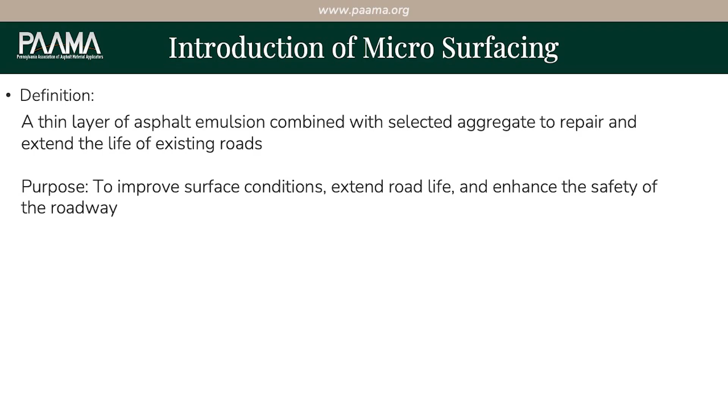Microsurfacing. So a thin layer of asphalt emulsion combined with selected aggregate to repair and extend the life of existing roads. Right, so we're extending the life of existing roadways, much like these other surface treatments. We want to improve the surface condition, extend road life, enhance the safety of the road. We're going to talk a lot about improving friction, improving polished roadways, applying something that we don't have to change the curb reveal, a lot of other benefits to microsurfacing.

In Pennsylvania, which is fairly unique to Pennsylvania, we use our own nomenclature, right? We use a type A, a type B, and a rut fill. We're going to go through the gradations here in a minute, but as you could imagine, type A being fine, right? Type B giving you a little bit more beef to your roadway, a little bit larger aggregate. And then your rut fill, now we're putting that down a little bit thicker. We're going to use a larger, coarser aggregate. This is taken straight from the 408, right? It says use to fill deep 2-inch ruts in a single pass. And I'm going to show you some examples of rut filling.

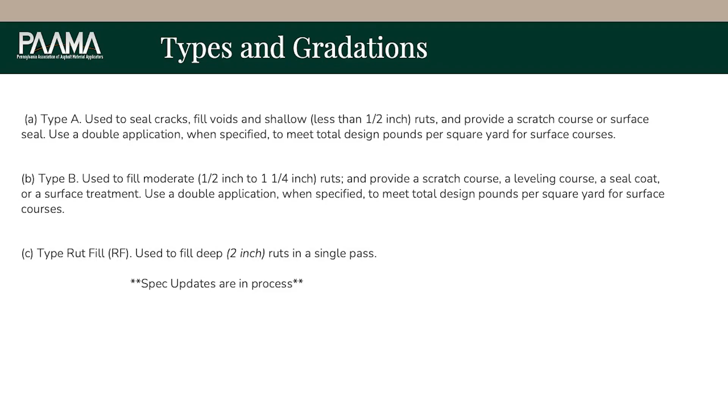Right, I feel like every contractor stands up and they have their asterisks, right? Special provision. We're currently, PAAMA, and I alluded to this earlier, trying to update the specifications with PennDOT. It's my understanding that will become less than 2 inches. ISSA's guideline, so the national guideline, is 1.5 inches for microsurfacing. And in some cases, depending on return to traffic time and other problems that could arise, I don't know that that's the best use of microsurfacing, especially as those ruts change in size, change in width, and the pavement condition underneath, right? So the rut fill, to me, is always a little bit of a moving target, but 2 inches is aggressive for microsurfacing.

So as we look at the gradation chart for type A, 9.5 millimeter, at least 100% passing at 9.5. You can retain some at the number 4 sieve. For a type B, which is, I'll go back to the District 3 presentation from this morning, commonly used as the first layer, right? So we're putting that down first. That's a 12.5 top end, 12.5 millimeter.

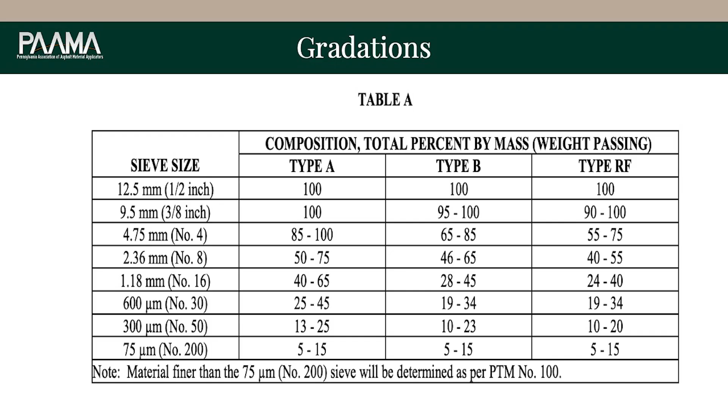Microsurfacing. When we're assessing a roadway, and we'll get into some of those assessments, we're looking for polished roadways, oxidation, certain raveling, right? And we're trying to stop that in its place before it gets too far gone. Another benefit of microsurfacing is going over a bleeding road. We can start to trap some of the softer asphalt.

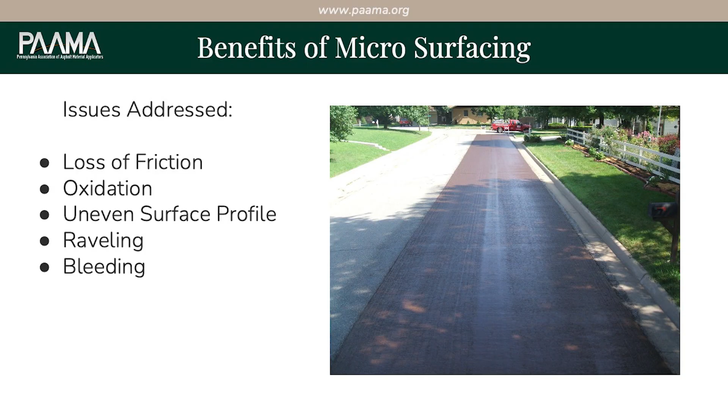Say we've chip sealed a road for the last 25 years, and we've put soft, flexible asphalt in place, right? And our aggregate from the chip seals is starting to drop down in from hot weather, from increased traffic volumes. Maybe the type of traffic has changed over the years. A lot of our roads, specifically in Pennsylvania and other Northeast states, have been chip sealed for a long, long time, right? And so we've added softer asphalt blends over time, oftentimes at different application rates. And we start to see that flushing coming to the top, sometimes bleeding on hot days, right? A microsurface can start to lock some of that in so that it can't continue to rise through it.

So as we alluded to earlier, we're looking to increase skid resistance, improve the color contrast between the pavement and the striping. Right, so an oxidized pavement oftentimes turns gray, right? Very gray. We start to lose our color contrast. It's hard to drive at night. It's hard to drive at certain times. Maybe on a chip sealed roadway, we have very flushed pavement in the wheel path, right? And then grayer pavement where the aggregates, depending on your color of aggregate, in different areas. It's hard to retain paint on some of those types of roadways.

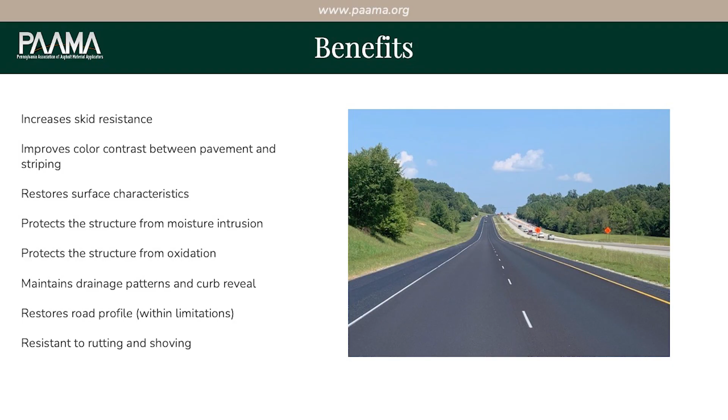Microsurfacing is also resistant to rutting and shoving, right? So once it's in place, now the curing process needs to happen for that. So when we talk about rut filling, we're not putting it at 2 inches and then returning traffic immediately with 18-wheelers over those 2-inch depths, right? And expecting this thing not to start to belly out. This is also why we start to pair microsurfacing with itself in terms of 2-lift applications.

When we go through the candidate selection process, we want to look at the current surface, current condition of the road, right? So we're looking at potholes, types of cracks. We've talked a lot about working cracks versus non-working cracks, longitudinal versus transverse cracks. What types of cracks are we looking at and what's causing them, right? Microsurfacing, again, is a surface treatment. If this road is failing from the bottom up, microsurfacing is not the answer, right? Nor is chip seal or other surface treating applications. We're talking about a structure that we're trying to seal from the top down.

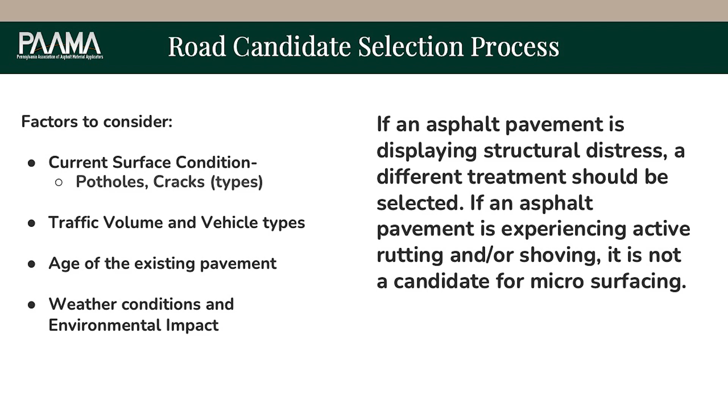Type of traffic, amount of traffic, right? Age of the existing pavements, different weather conditions, environmental impacts. If a pavement is displaying structural distress, or it currently has deep rutting, shoving, and rutting that's currently happening, right? If this rutting is getting worse annually versus it's reached its depth, we have another issue at hand that microsurfacing cannot treat, cannot solve. So when we look at candidates, we're looking for these types of things in order to rule out or rule in microsurfacing.

Going through the selection process, I think, involves a myriad of people, right? And I think that this group is interesting and exciting to me to see get together because it joins those forces. You have people in the field, you have design engineers, we have different office staff, we have maintenance staff, a lot of different people in the room, and that's exciting to me to see everyone kind of learning the same thing, right? Because everyone plays a different role in designing.

And in my experience, getting those people in the same room and sharing those opinions has led to success versus being fragmented. We only have this much money and this is what we're going to do to this road. And then we go do it. And then the maintenance staff is bitching because it failed, right? And then everyone else is left holding the bag to try to repair it. Story old as time. I don't know the solution, but I have a feeling that this is a good step in the right direction.

Right, so as we go out, we want to do our initial assessment. Conduct a visual inspection of the roadway. Identify the signs of surface distress, cracking, potholes, raveling. What's causing that? Is it the age of the pavement? Is it a base failure? Is it a drainage issue? Right, and talk through those things. As we come back to the office, we're doing a little bit of data collection.

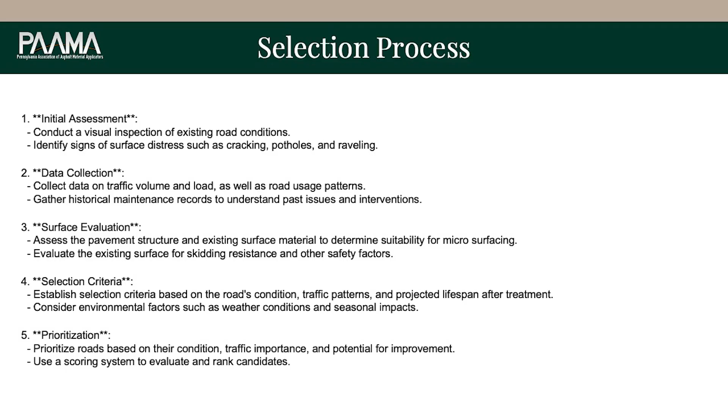And proper communication both with inspection staff, ACEs on the job, public, and our own forces that are out there. So whether that's traffic control, our support trucks that are coming in and out of the zone, all of that is super important, and understanding what our limitations are. Microsurfacing, it is visually nice, right? It's black, it looks like pavement. But it has its own limitations. We can't put it on that thick.

So we've had a lot of success in combining microsurfacing with a lot of other treatments. Specifically speaking, crack seal is very common, right? Very common. We go out, you crack seal anything larger than a 1/4 inch typically. Terry alluded to using a squeegee over that so that we can come over and not have our screed or our mat catch on the microsurface, or so that we can stop any reflective crack seal from shining up through. We can start to rut fill, right? So we can put a rut fill box at a certain width in the wheel paths, bring that up to level, and then microsurface over our rut fill.

Putting two combinations of microsurface is probably the most common practice of microsurfacing, right? So we want to put it down somewhere in that 20-pound range twice. And we can start to do that. We leave a little bit on the edge, then we overlap it a little more, helps with drainage, right? But also, that's where we start to see the benefits of microsurfacing.

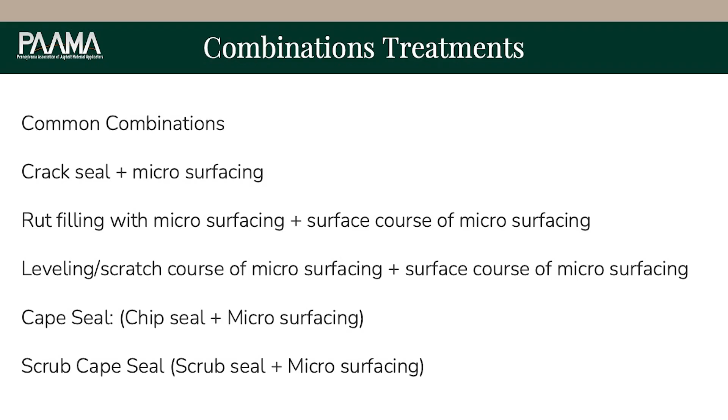One of the things that I left off of this presentation is the addition of microsurfacing or slurry surfacing as an interlayer between hot mix. So a lot of times on a roadway, if we're looking at a hot mix overlay and we have a polished road, we don't have anything for that layer to grab onto. Right? We can put a microsurface or a slurry surface over that roadway and then come back. We have it sealed now. We can come back and put our HMA over that. So that has been fairly popular in the recent years.

The process. Quality aggregate, always crushed: granite, slag, limestone. Right? We want it to be dense. We don't want too much water absorption; you'll never limit it totally, but the less that we have, the higher quality. Dense aggregate, always crushed, mixed with an asphalt emulsion.

Right? So like cationic, quick set, polymer modified emulsion. Mineral filler could be Portland cement, hydrated lime, limestone dust. One of the common misconceptions is that microsurfacing uses Portland cement, so then it's therefore brittle.

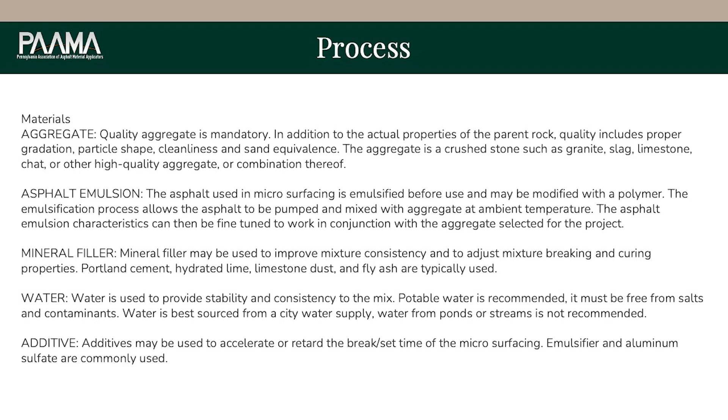Our application sequence. Calibrate and set the paver for the job mix formula as determined by the mix design process, right? So in the 408, there's a mix design process. There's also different standards of how we mix design, the tests that we run. And you're going to get asphalt content. You're going to get amount and type of emulsion, amount of emulsifier or chemical in your emulsion. All of these different things are going to be told to us. And then once we get out in the field, we need to calibrate so that we can meet those standards of the job mix formula.

Test strip: by PennDOT standard, a test strip is required. And so we're going to go out on the road and pull this 100-foot test strip and verify that, one, the equipment's ready, right? But two, our microsurfacing is breaking and our return to traffic time is where we want it to be. Right? The spec is 60 minutes or less. And that's kind of fluid, usually 60 minutes or less, as the ACE or the inspector is communicating and seeing what we're working with.

We want to make sure that our pavement's prepared, right? Our existing pavement needs to be cleaned, as clean as possible. We want it dry. We want to know exactly what we're putting it over, and we want that to be uniform from start to finish. In other words, leaves, debris, things in the way all need to be gone with a pickup sweeper or some type of large sweeper, as well as blower units, anything else that's necessary to clean that roadway. We're going to apply the micro and open back up to traffic, like I said, within 60 minutes.

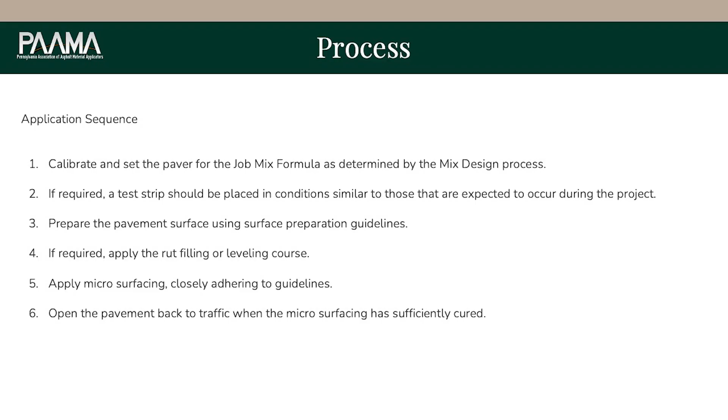Microsurfacing, for those of you that aren't familiar, is done with an aggregate stockpile in a yard that's somewhere near the job, hopefully. And all of the aggregate is put through a screening plant. And so we need to make sure that this aggregate, as it's maybe gotten wet or changed over time as it's been sitting there, isn't bridging or clumping, right? So we're going to put it through a screening plant prior to loading into our support trucks.

I have to stand up here. Let's put it at my screen.

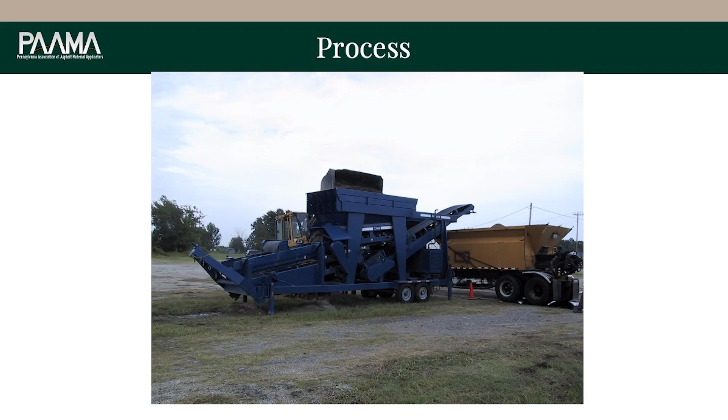Before the screed is a pug mill, right? So this is being ratioed by computer into the pug mill. The pug mill is turning, right, and mixing our emulsion, our water, our cement, our additive, and our aggregate into a slurry micro surface. It comes out, it's augered out to the width of the screed, okay, and put down.

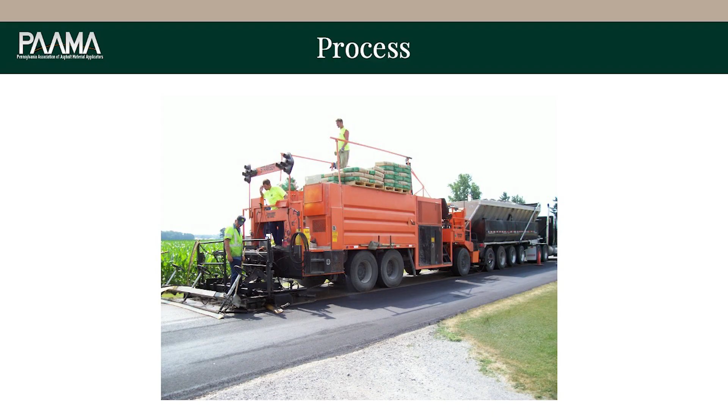There's multiple screed setups. Commonly, there's a rubber strike or a steel strike off, and some contractors use a burlap in order to give the finish a textured look. Questions about the process for anyone that's not familiar with it?

No one wants a cone whipped at them? Come on.

So in this picture, this is an example of rut filling, right? So we've used a rut fill box to go over the wheel path specifically.

You can just pick somebody, Scott.

This looks to be about a 6-foot pass, right? So we've brought this up to level, outside center, and then center to outside. And now we can come back over and apply the same uniform 20-pound lift from skip line to outside line.

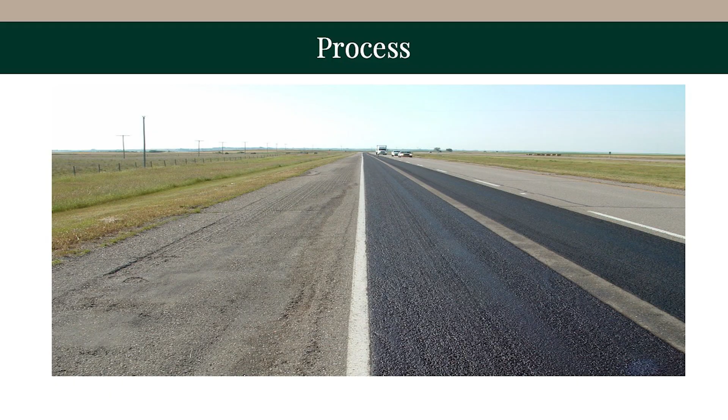Here you'll see fresh microsurfacing on the left-hand side, right? And probably yesterday's microsurface on the right-hand side. And you can see a little bit of the brown emulsion look where this hasn't broken completely yet, and it hasn't cured out. On the right-hand side where the traffic is driving, black.

And as you can imagine, one of the downfalls of micro is that this, on the left-hand side, is wet. So if a car drives through it, if we put traffic over that, it is going to leave marks in our mat and probably get on the vehicle a little bit and not make someone too thrilled. So traffic control is certainly a concern, or needs to be something that's addressed prior in planning. But also understanding our limitations in length of the zone, types of zones that we set up for our paving plan.

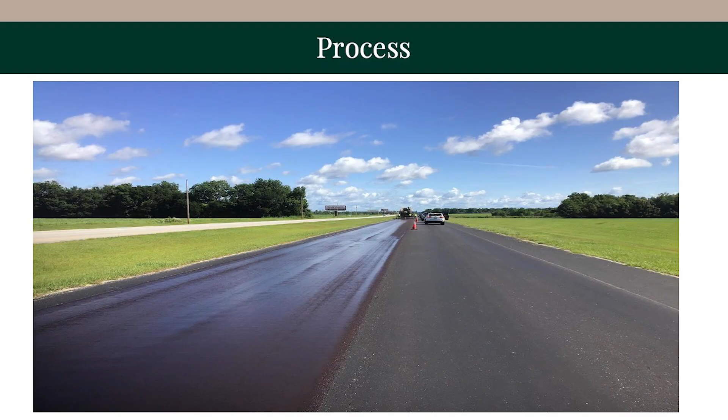And when we talk about expectations and limitations, Terry had the slide up of pavement condition earlier and when to prescribe these treatments. So we're in a B to C range. B would be great. And I think all of us could agree that if we were putting microsurfacing over 5 to 7-year-old hot mix, man, we're doing something right, because that means we don't have crappy roads elsewhere in our district that we're trying to appease the public with. And that's the goal. We're probably most commonly seeing somewhere in that B to C range, right?

So our life expectancy of micro in that range is somewhere in the 6 to 8 year range. We do commonly see micro used as a 4 to 6 year treatment, right? In that stopgap range where our budget says we're limited, but the amount of calls that we're receiving or the failure on this road, we need to do something with it quickly so that it doesn't blow apart all the way to where we're full reconstruction. So somewhere in that B to C range is where we most commonly see micro prescribed. Knowing the expectations and limitations of it is important.

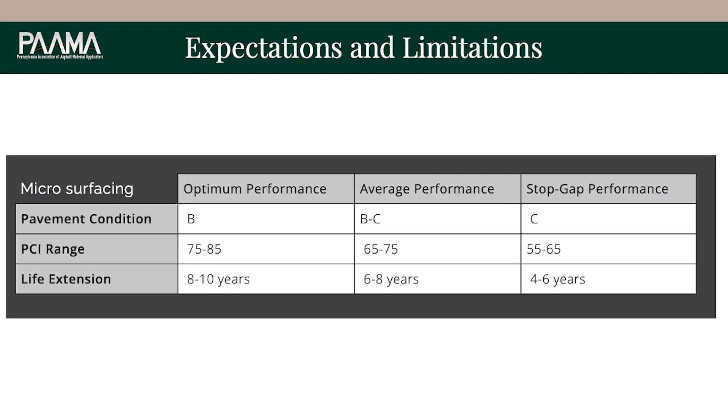So if we're prescribing a microsurface to a C road, we are not going to get 10 years out of it. And understanding what that roadway is, how we've prepared that road, meaning crack sealing, maybe we've used a combination treatment with it, all of those things help. But ultimately that road has seen better days, and we're trying to get a surface over it. It is not an ideal candidate. Not to say that it's a bad candidate. It's just that we're not going to get that 8 to 10 years out of it because it has seen some weathering over time.

That's all I got. Questions? Yeah. When doing just a simple crack seal and microsurfacing process, what's the average depth of microsurfacing? 20 pounds is usually about a half inch. Okay. So that'll be just in the single pass? Single pass, yep.

I'm gonna hit the chandelier. I'll come over in a minute. Who else has something? Yeah.

Thoughts on removal of paint lines prior to microing or not? Yes. Epoxy, yes. Waterborne, not necessary. Is there a certain point in the age of the epoxy where you go over it and not remove it? If it's now 4 or 5 years old? I wish I could say yes, because removing epoxy is a pain in the butt. But I wouldn't stand up here and recommend that, no. Good?